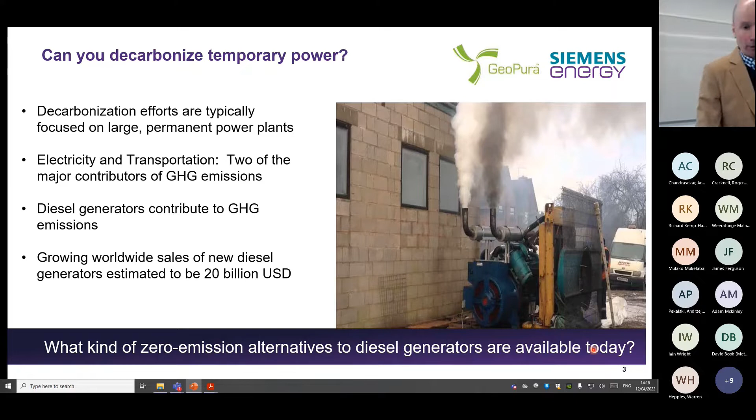Just quick examples. I'm going to quickly go through the good news before I get to the bad news. So these are units. Siemens Energy is written all over this, and that's because GeoPura is a small company at the moment. It's 35 people. Yes, they've got PhDs and lots of engineering experience and a fabulous design for a generator. But the thing that makes it possible to move the dial globally, all being well, is a partner like Siemens Energy. There could have been others, but Siemens Energy provide the global scale, the manufacturing capability, the support capability.

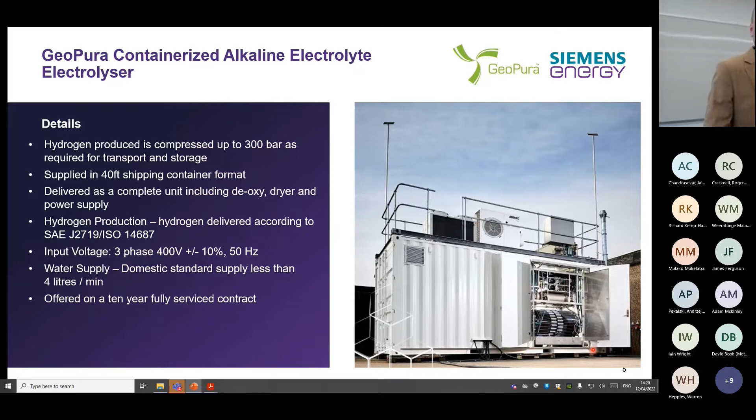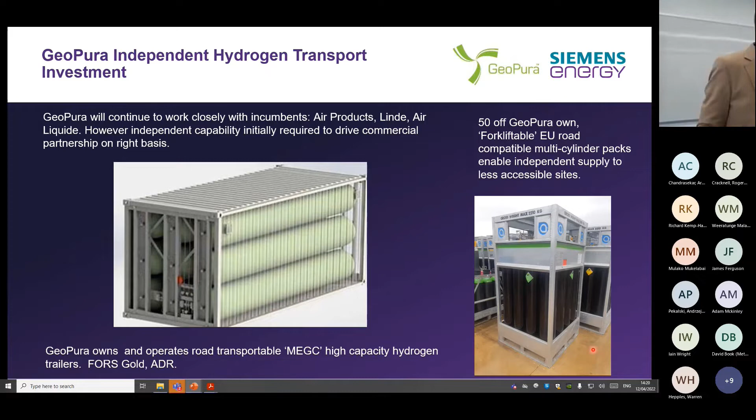And we're investing in transportation. So we have our own MEGCs, the bulk transportation, as well as the MCPs, which are the forkliftable units. Compressed gas, 300 bar, just compressed gas. Everyone wants it. That's the great news. Lots of great names. They all want to invest. They want to throw money at us. Fabulous. Everything fabulous. Everyone wants it.

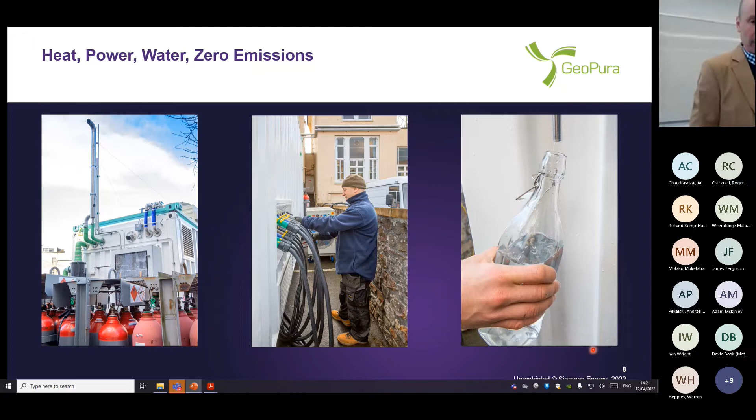Great story. You know all about this. The only exhaust is water. No NOx, no CO2. I told you I've got problems. We're going to come on to the problems. And so this all is the good stuff. Hydrogen in, power out, water out, bit of heat if you want it. What's not to like? Works on electric and everything.

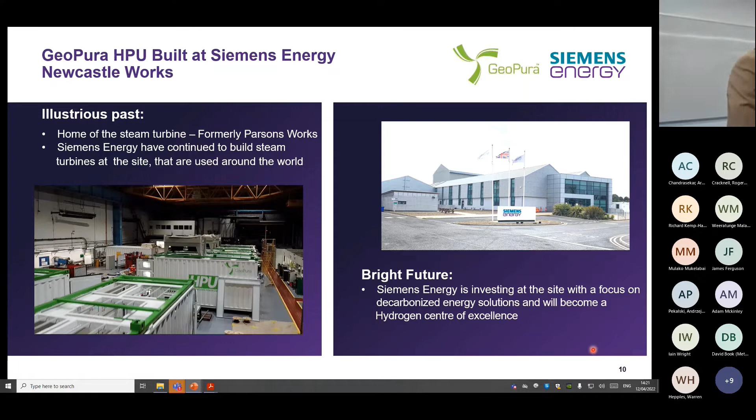Siemens Energy, the manufacturing partner, yes, we're building these things as fast as we possibly can. They've already built one factory to build these units. We're talking about building more. The demand is so strong. Where's the problem? Where's the problem? Well, first of all, I've indicated one, just getting enough fuel.

That's the immediate problem. So we've actually got to have the renewable energy and the electrolyzers and the supply chain to actually put the electrolyzers on the ground and produce the fuel, as well as getting hydrogen from other sources. So we're using biogas, basically. We'll do anything we can to get hold of hydrogen that has relatively good carbon credentials.

But we've obviously got a problem because we can get so far with compressed gas, but it gets to a certain point and it's just too hard to move around. We're buying these tube trailers. They cost 250 grand or something, and you get a few hundred kilos in one, and you're pounding around the country in them. It's just not great.

We're all right for the next couple of years, but we're going to need different molecules in the future. I don't have to tell you guys what the issues are with hydrogen. It's fantastic, but it's hard to get what you need in a small enough space. And that's before we start talking about gas turbines and larger applications. So I'm putting up there customers like Microsoft and Amazon and people with data centers, and you start with Balfour Beatty with huge drilling rigs and things that are multi-megawatt, 10 megawatts, 20 megawatts.

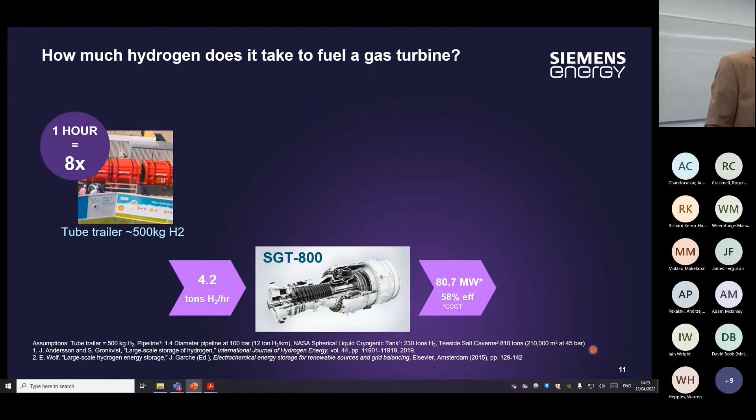And that's a small gas turbine. They're 10 times the size of that as a standard gas turbine that you might put in a power station or something of that sort. And whatever you look at, you need 3 tanks that size for a week, 3 of those, just to keep one of these gas turbines going for a week. Even when you start talking caverns, you can have 4 salt caverns, and you're going to keep a small gas turbine going for a month, basically.

Gaseous hydrogen is hard. I'm not saying we shouldn't be doing it. We absolutely have to be doing it and building the logistics, but we have to understand that something has to come next, basically.

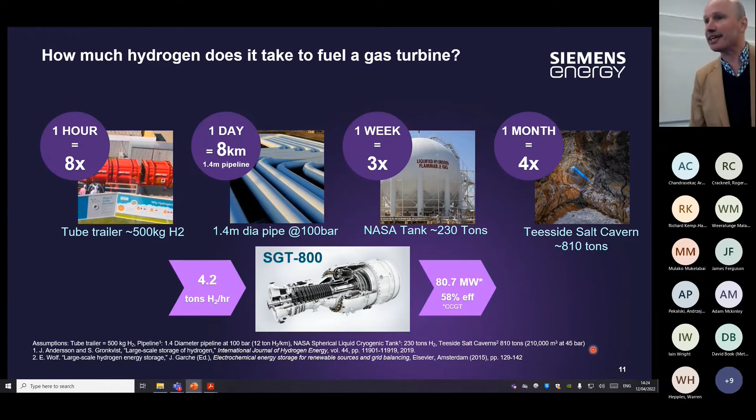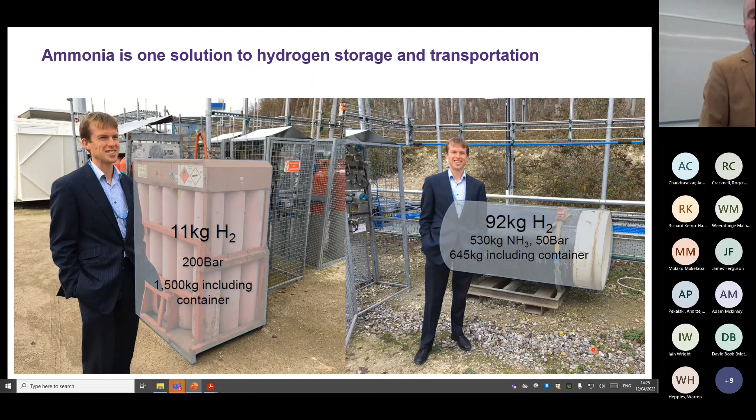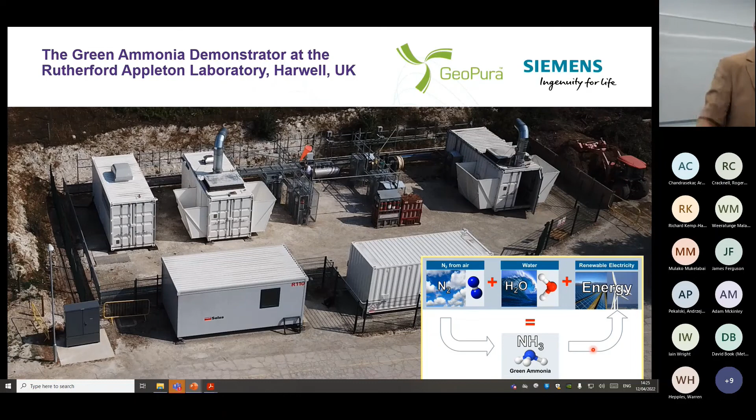You can either combust the ammonia directly if you wish to, or use it directly, or you can crack it back into hydrogen. We also have an ammonia cracking project that we're working on with Siemens Energy and FFI, part of the Fortescue mining group.

But to indicate the kind of savings that you get, you need about 1/16 of the transportation, 1/16 of the storage capacity if you're using ammonia, as opposed to what you would need if you were moving compressed hydrogen gas around. And it just makes some of these equations a bit more workable. So if you take an ammonia, that is an actual anhydrous ammonia tank. It's not such an unusual thing. Of course, ammonia is not particularly pleasant. A lot of fuels aren't, but people are storing it and moving it around right now. These things just become a bit more tenable.

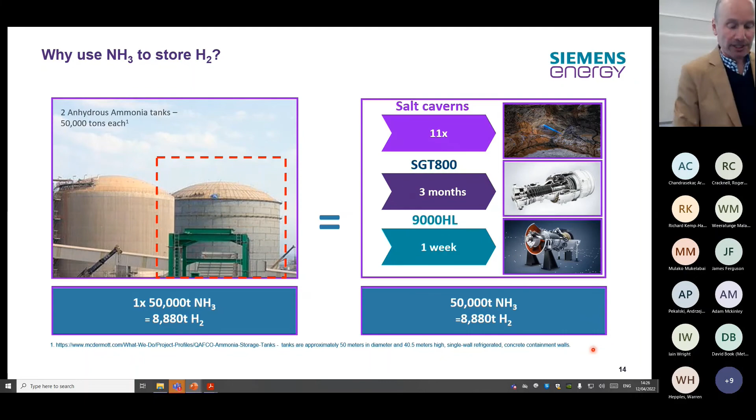And it's already got a massive supply chain. Ammonia, of course, is an important product, in general fertilizer, other applications. We're moving it on boats, we're moving it on railways, we're storing it, we're pretty familiar with it. So if we can use green ammonia, it certainly does offer us some potential solutions to solve some of these problems in terms of transportation and storage, and makes everything just that bit more commercial. Because in the end, if we want to make a difference, if we want to move the dial globally, it's got to be commercial. Otherwise, it's not going to happen.